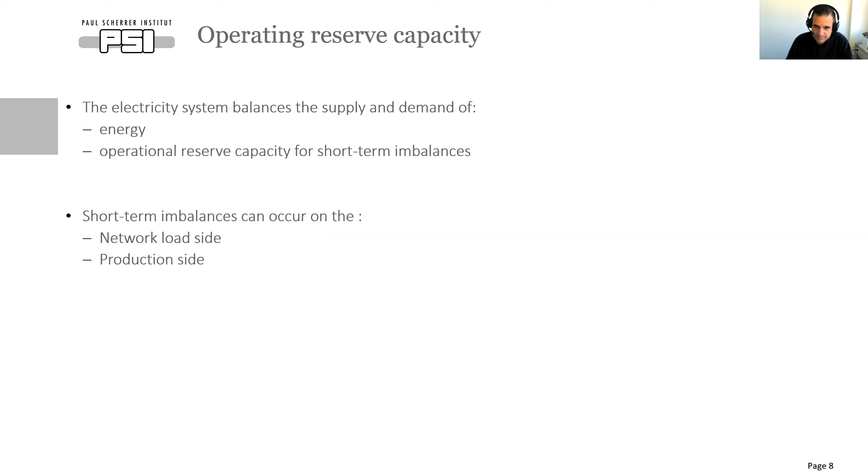And basically, what we see here on the right is a power plant operating at a level which is defined by the variable var online. So var online is the online capacity of this power plant, which has, of course, to be above the minimum operating level. And there is also the maximum capacity defined by var cap, and the available capacity, which is the product between var cap and NCAP AF.

Now, this area between var online and the maximum available capacity can be defined as upward operating reserve capacity that allows the power plant to ramp up when it's needed, in order to provide for a very short time the required power to the grid to stabilize the grid and also to balance again energy supply and demand in the case of imbalance.

Similarly, you see another yellow area towards the minimum stable operating level, and this is the downward operating reserve capacity, which means that a part of the generating capacity of the power plant is reserved. So the power plant doesn't go into this yellow area when it ramps down, but this area is reserved in order for the power plant to provide a downward reserve capacity.

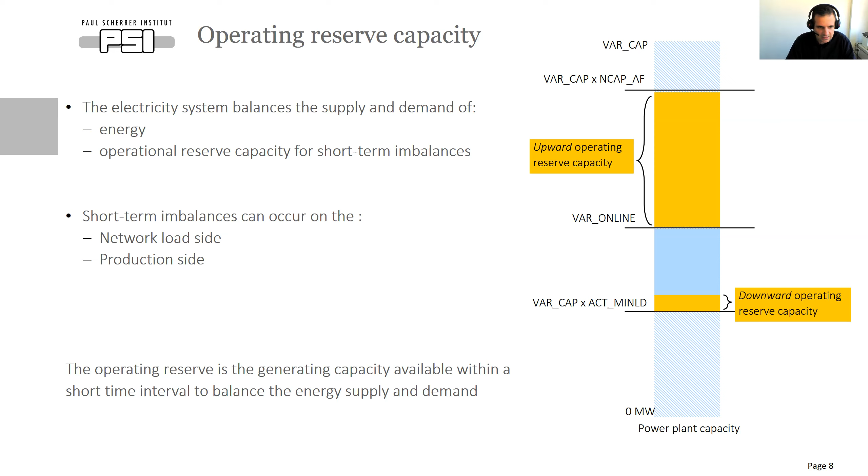So this is the operating reserve capacity, and it's called operating because this reserve capacity is employed when the power plant operates. And there are 6 types. Now you see 3, but I'm going to tell why it's 6 in a while. So there are different types of operating reserve capacity, and these types actually are differentiated according to their activation time.

So the fastest operating reserve capacity is called frequency containment reserve, or FCR. It should be activated automatically in seconds. So this means that this type of reserve can be provided by really fast ramp units. Then we have the second type of reserve, which is activated again in seconds, but not so fast as the FCR. This is called automatic frequency restoration reserve.

And it's activated after the FCR to relieve the units that provided FCR, because these units need to go back to the electricity production, to the electricity market. So additional units are coming online to continue to provide operating reserve if this is needed. And this can be automatic or it can be manual.

And the third one is the so-called replacement reserve, which is activated after the FRR. And this has an activation time of hour. So if the disruption in the grid or in the supply-demand balance is longer than some minutes, then the FRR units are relieved. They go back to the electricity market, and additional units providing the replacement reserve are coming into the reserve market. The RR, the replacement reserve, is not always implemented by all TSOs.

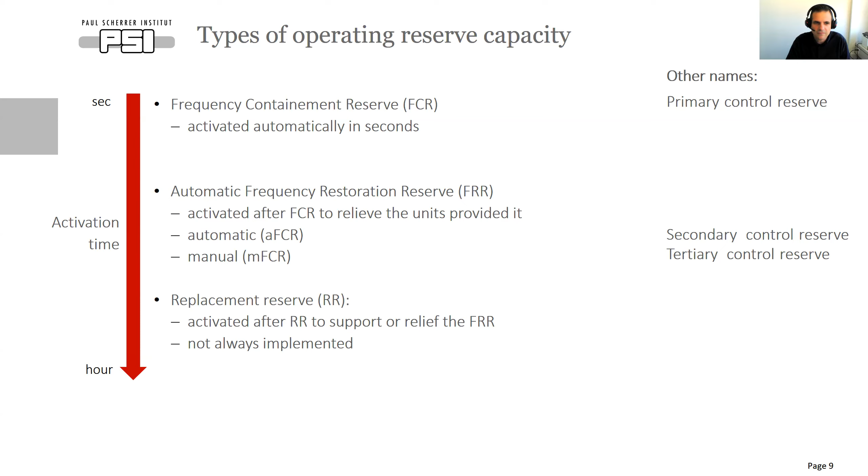The nomenclature of these reserves follows the ENTSO-E convention. There are also other names for them, like primary control reserve, this is the FCR, or secondary control reserve, this is the automatic FRR, or tertiary control reserve, this is the manual FRR.

And the reserve can be positive, as we saw before, or negative. Positive when there is a shortage of supply and we need to increase the production capacity, or negative when there is excess of supply and we need to reduce the production capacity. It follows that negative reserve can also be provided by demand units.

For instance, from a heat pump, when there is excess supply, then we can employ additional demand devices to absorb this excess electricity. This is a negative reserve, and this can be provided by the demand devices. As I said before, heat pumps or batteries at the demand side.

So let's see a practical example of how all these reserves are coordinating and are linking together. So I will try to put my pointer. Okay, good.

So let's assume that we are in a normal operation of the European grid. This means that the grid operates at the 50 Hertz frequency. And suddenly, in France, a power plant goes down. What is happening in this case is that there is instability in the grid. So you see here that this power plant was providing a power of 1.2 gigawatt. And then for half a minute almost, this power is lost, and this causes a drop in the frequency, which is not good.

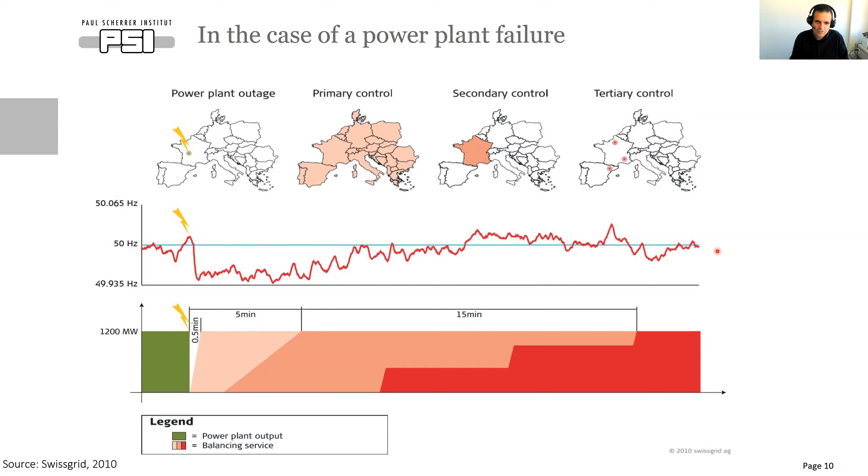So as you can see, there is a hierarchy on how these reserves are activated. First comes the very quick reserve, the FCR primary, then the secondary, which is for a longer period of time, and then the tertiary.

So one key point here is how we calculate the demand for reserve requirements. And this is very complex and can differ between countries, and it can be different for reserve types. Usually it is a mix between deterministic and probabilistic approaches. Now I'm going to show you a very scary picture, but I'm not going to go into the details. So this is a real example. This is how the Belgian TSO calculates the reserves.

And basically what you can get from this picture is that these reserves are calculated based on the forecast errors of solar PV, of wind, of some outages, and other imbalances in the system. These are all probability distributions that are joint. They create a complete joint distribution of all these imbalances of the system.

And then what we try to do is to set the reserve demand at that point in this distribution where we lose about 1% of the load, so that we cover 99% of this distribution that we are able to meet, and we have a probability, let's say, of 1% to lose the load. At that point, we set the reserve demand. But I will come back to that. So, what I'm trying to show here is that it's quite a complex procedure.

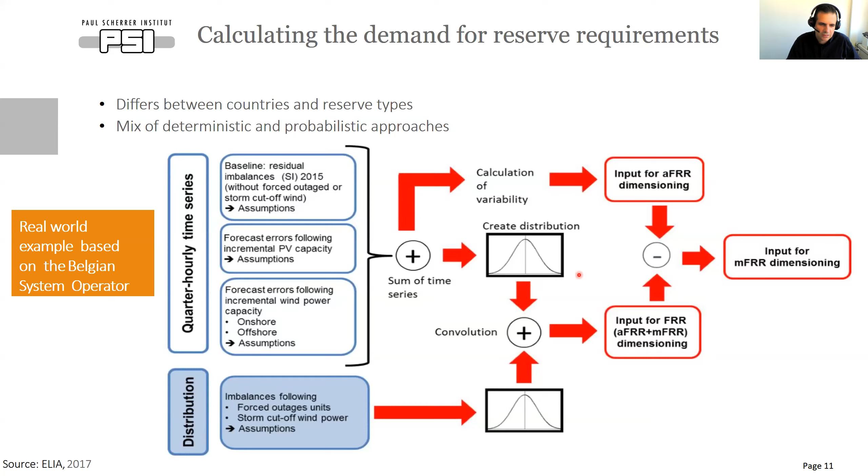So let's decipher a little bit this complex procedure. The deterministic component of this demand calculation usually is equal to the loss of the largest single grid element. This can be a power plant, a grid transformer, a grid power line, and it's calculated both for negative and positive reserve. Also, sometimes this deterministic component is used to determine the reserve which is outside the control area of the country. And I will give an example on that.

In the ENTSO-E control area in the European grid, the FCR, the fast activated or primary control reserve, is not defined by the countries per se. This is defined by ENTSO-E because maybe you remember in the picture that when this happens, all the European plants need to go and provide it. So this needs to be defined centrally, and ENTSO-E defines that. And each country in the ENTSO-E area has a specific contribution to this reserve. And this is fixed, defined by ENTSO-E. It's outside the scope of the country.

Usually this is 3 gigawatt and contains the N-2 criterion, which means that ENTSO-E considers the largest 2 elements in the European grid. So this 3 gigawatt FCR is allocated to the different countries based on some algorithm that ENTSO-E applies. And this is the allocation for 2018 in this graph, where Germany needs to provide 600 megawatt, France 560, Greece 56, and so on. So this depends on the size of the country. For us this will be a deterministic approach, because when we're building a national model, this will be given.

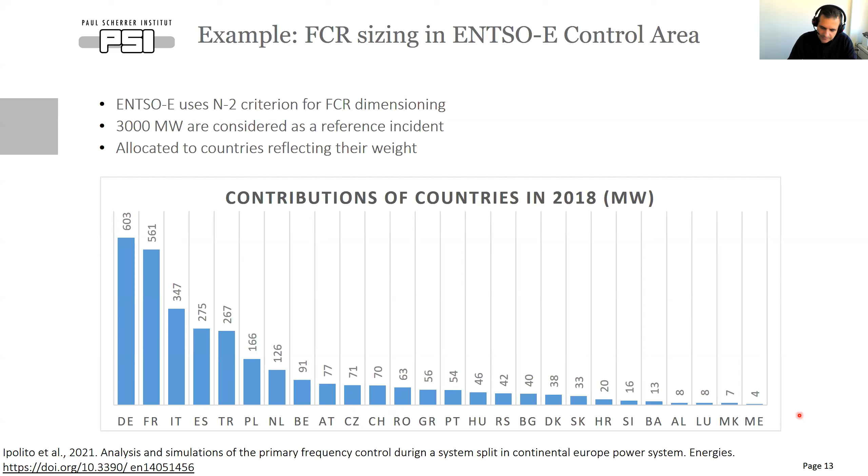Then we have the probabilistic component of the demand calculation. This probabilistic component, as I said before, is based on the forecast errors. And this can be calculated based on the historical time series of the system imbalances when these are occurring. And it's represented as a probability density function. So what we care about here is that the total contracted reserve covers at least 99% of this PDF. So let's see a little bit what is happening here.

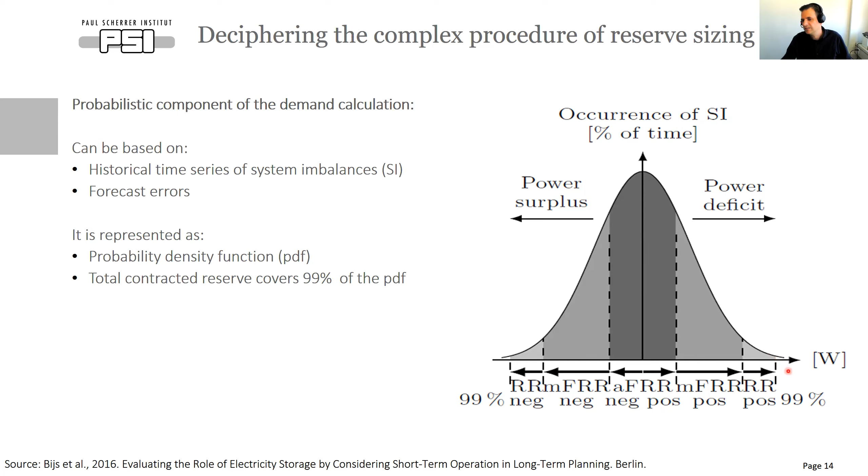So to set the demand for the secondary reserve, I move 1 standard deviation from the forecast error. So at this point, I set the demand for my secondary reserve. At this point, I set the demand for my tertiary reserve. And at this point, I set the demand for my replacement reserve. And this we have seen in a more simplified way.

What is important here is that when the reserve provision comes from a non-storage unit, what comes into play is the minimum stable operating level of the unit and the ramping rates for energy production, and consequently the ramping rates for reserve provision. So we need these dispatching parameters also in our modeling framework, the minimum stable operating level and the ramping rate.

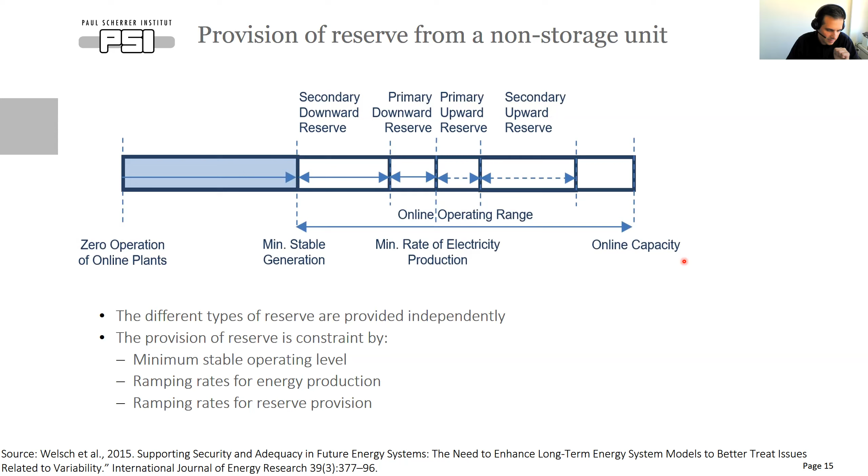And when the reserve is provided from storage, then we need to consider the fact that the storage needs to ramp up for some point in time in order to have enough energy to provide a reserve provision of power P, and then this energy needs to be also enough in order to give this power to the grid, to the reserve market, for a certain point in time. So the energy that the storage needs to have is the area under the triangle and the area under the square. This is the assumption also that we will take into the extension of TIMES.

So when a storage will go to the reserve market, we need to specify how much time it needs to ramp up the energy stored so that it can provide power P, and then how much energy needs to be charged in order to continue this provision of P for a certain point of time.

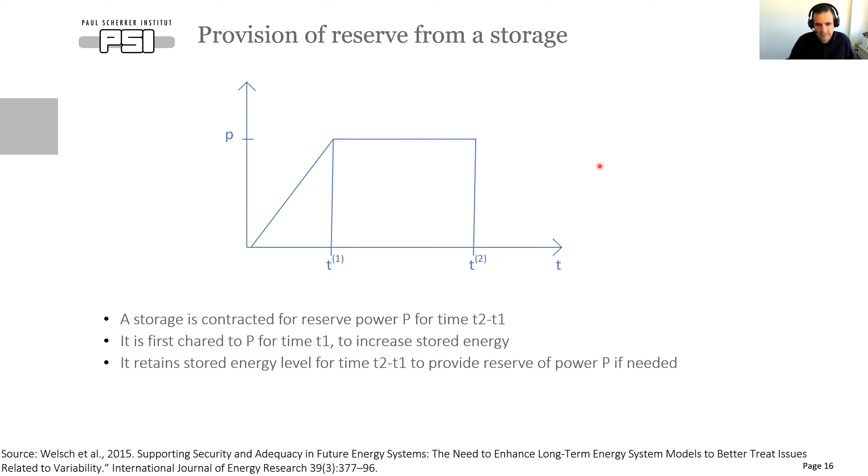And here comes a question: what is the difference between the planning reserve margin and the ancillary reserves markets? The planning reserve margin is the peak constraint that we have in TIMES. And actually, this is basically defined as a long-term forecast of the demand, and we give that as a percentage of the median peak load. And you can see here how the planning reserve margin is calculated by TIMES. So this is a very simplified approach again, but it gives the notion behind.

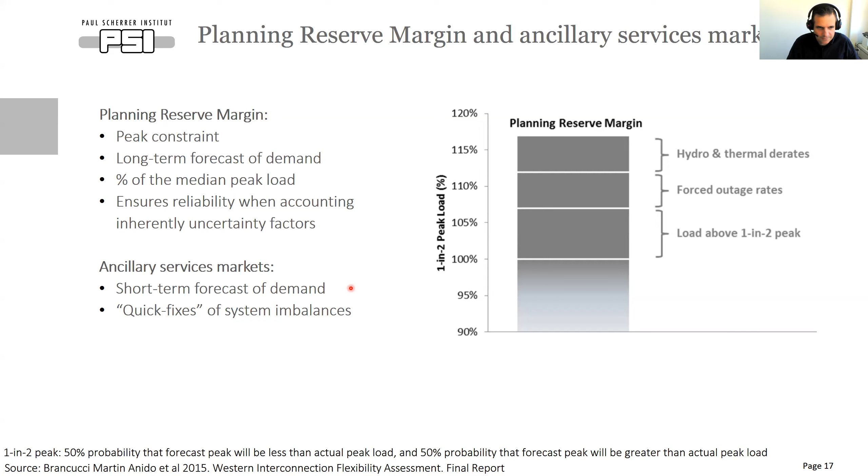The ancillary services markets, we can say that they are quick fixes of the system imbalances that are balancing the short-term forecast of the demand. So in that case, when something happens, let's say for 1 day, you don't have the luxury to get a new investment in capacity. So the planning reserve margin influences the long-term investment and operating decisions. The ancillary service markets influence the short-term operational decisions. So this is a brief overview of the ancillary services markets.

Each reserve is a TIMES commodity, a normal TIMES commodity, defined by the user, whatever name the user wants to give. Of course, when we talk about reserve provision, it means that we just have the capacity available to provide the reserve. So there is no consumption related to the reserve provision. The fuel consumption relates only to when the reserve is activated, and this we don't model. And the price of reserve will come as the marginal cost, the shadow price of the EQ_COMBAL from the commodity balance, as every other normal commodity of TIMES.

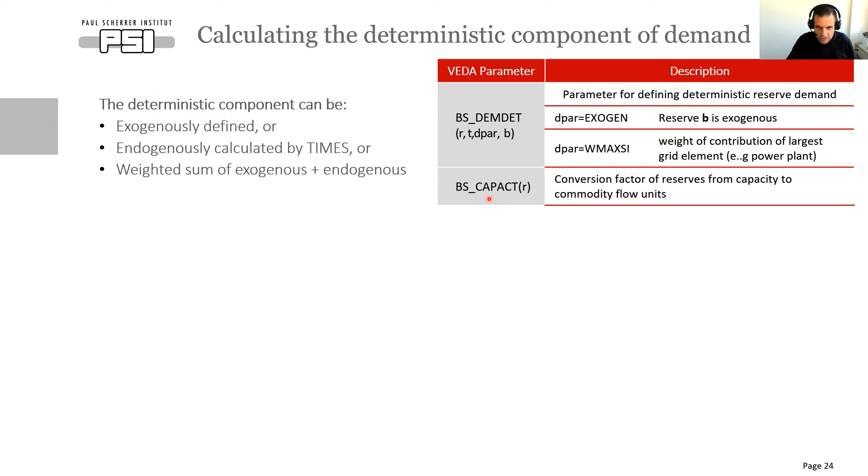I'm not going to give a lot of equations, only the most important ones, and this is quite an important one: how the deterministic component of the demand is calculated. As you can see here, this equation says that the deterministic demand for balancing services should be greater than or equal to the exogenously defined deterministic demand. This BC here is this BS_CAPACT, plus the endogenous deterministic demand specified as a weight of the maximum component of the grid.

What is happening here is that this inequality is repeated several times, once for every process defined by the user as contributing to the calculation of the largest grid element. So if the user specifies that nuclear, hydro, pumped storage, and for instance an interconnector should participate in this calculation, this inequality repeats 4 times, and it is satisfied, of course, by the maximum.

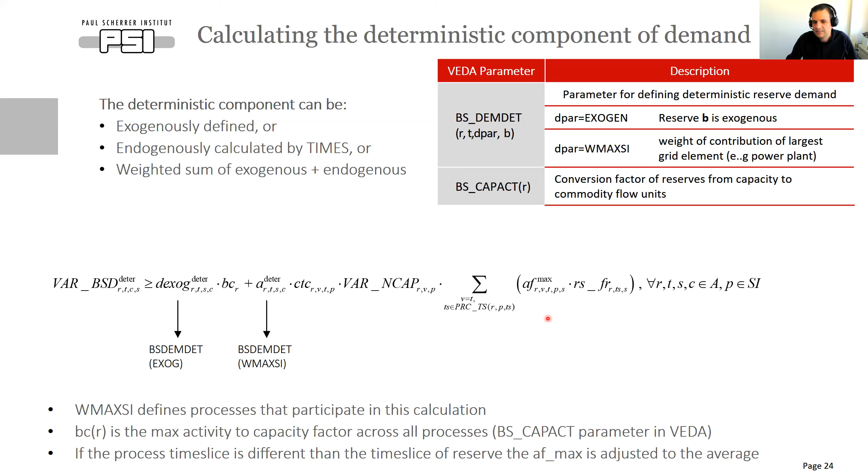So in this case, what TIMES will do, we'll see what is larger: the nuclear power plants or the grid interconnectors. This implies that this inequality here will be repeated 2 times, one with VAR_NCAP on nuclear, and another one with VAR_NCAP on grid. It follows that if the grid, for instance, is larger than nuclear, the second inequality becomes binding, and the first one becomes redundant. This is how the maximum largest component is considered into this equation.

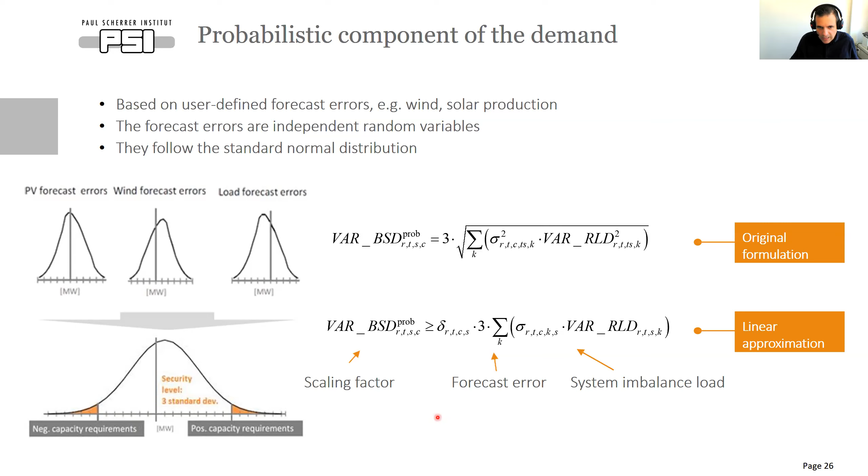Let's see how we can define this. So I repeat here the demand equation for the probabilistic component. We need just 2 parameters: the sigma, which is the forecast error regarding a variation k, meaning if it is the forecast error on wind, k equals wind, or solar, or demand, etc. And the delta, which is this adjustment that we do in order to make a better approximation. It's pretty straightforward, I hope.

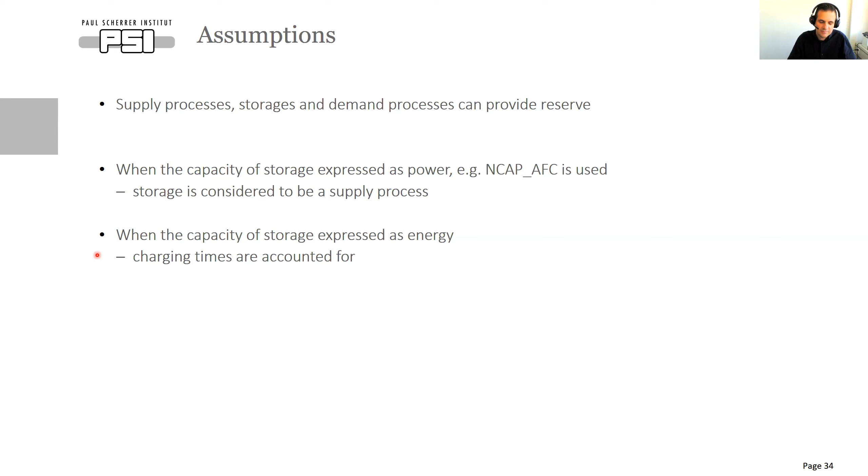But if the storage capacity is expressed as energy, which means that the capacity of the storage is bounded by the stored energy, then we need to take the other approach where we need to take into consideration how much energy the storage needs to have in order to be able to provide the power that needs to be provided, plus to have enough energy to continue providing this power for a given time.

So for the reserve provision from supply processes, there are only two parameters that one can use. The most important of the two is the BS_RMAX. The BS_RMAX is the maximum contribution of a process to the reserve provision of a given type and considers the ramping rate and the duration of the reserve provision. And you can see here the example.

If I have a coal process in my model in which I have identified an hourly ramping rate, 30%, and this process is contracted, needs to provide secondary reserve for 7.5 minutes, then what I do here is that I set the BS_RMAX equal to 30% divided by 60 minutes, multiplied by 7.5 minutes, and this becomes 0.0375. So this means that 3.75% of the available capacity of the process, because of the constraint that it has on the ramping rate, can be contracted for reserve provision.

And how you find the 7.5 minutes, this is again from the configuration of the ancillary services market of each country. Important is, and you can see here some example, that the BS_RMAX needs to be higher for the slower reserves. So the slower the reserve is, the more capacity is available to provide it. If we don't set the BS_RMAX for a process, the process does not participate in the ancillary services markets. If a storage is modeled with NCAP_AFC, so the capacity of the storage is expressed in power units, the BS_RMAX needs to be defined.

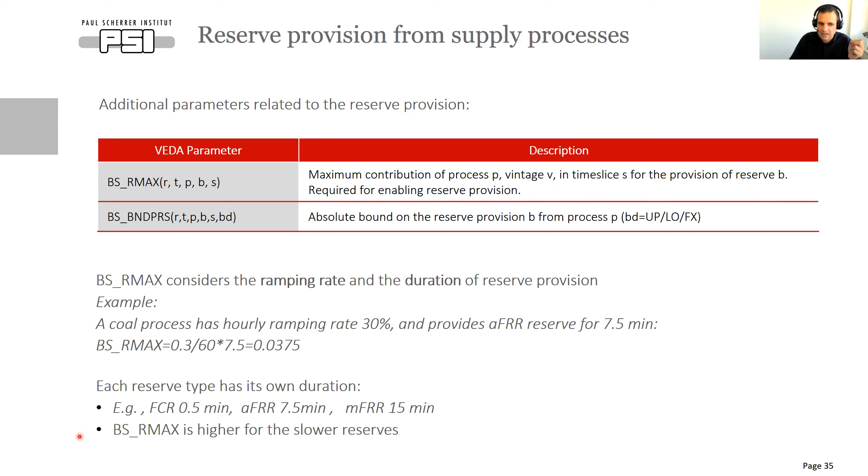This implies that for the supply processes, because the BS_RMAX relates to the ramping rates and also implicitly to the minimum stable operating levels, these two VEDA parameters for minimum stable operating level and maximum up and down ramping rates need also to be defined. Otherwise, the equations do not work.

The same holds for the reserve provision for demand processes. So it's again the BS_RMAX that defines that a demand process needs to go into the reserve market. Of course, a demand process provides negative reserve and doesn't have a ramping or minimum stable operating level. So here, the BS_RMAX just applies as a percentage on the available capacity of the demand process.

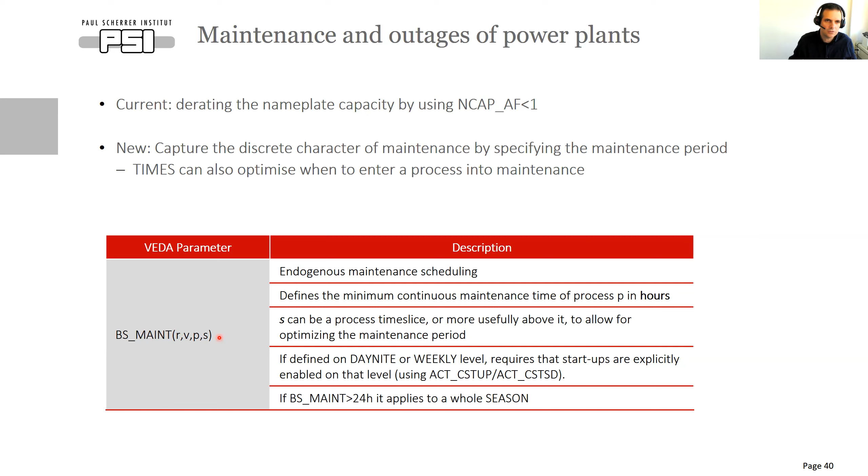So if we enable this parameter here, the balancing services maintenance, which is defined over region, vintage, process, and time slice, we instruct TIMES that it can do an endogenous maintenance scheduling. And what we give here is how many hours this maintenance lasts. If this maintenance is more than 24 hours, this applies to the whole weekly level or to the whole season level. It depends how the time slice tree is defined. And this means that the power plant will not be available for certain time slices. So this is complementary, if you want, to the NCAP_AF.

And another extension came with this, but is also in the normal version of TIMES. So for this particular one, you don't need to enable the balancing services, while for the previous one, you need to enable it. This is an approximation of the storage degradation due to extensive cycling. So there is a parameter called STG_MAXCYC, which is the maximum number of cycles for a storage process. It has a particular application when we are considering especially batteries in electric cars, and I'm going to give an example of how this is working.

So let's say that the capacity is 1 gigawatt hour. This is my installed capacity of batteries. Okay, 1 gigawatt hour obviously is not for one electric car. The lifetime is 10 years, and the maximum cycles are 4,000.

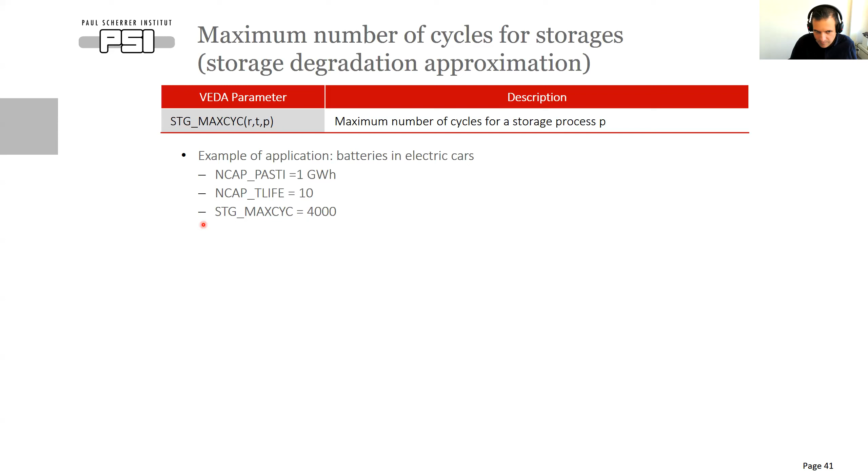Let's say that I have 2 seasons in my time slice tree, season 1 and season 2, where the first season I have it very nicely on an hourly level, while the second season has 6 time slices, S1, S2, S3, S4, S5, and S6, which means that each time slice here in season 2 corresponds to 4 hours in a day.

And you can see here how TIMES schedules this battery of electric cars. So it charges the car during the night in season 1 and discharges the car during the peak hours, when people, let's say, are coming home after work, and the same in season 2. And let's see a little bit what is happening here.

So in the VAR_FIn, what is coming into the process over the whole year in both seasons is 1.8 petajoules. This is 500 gigawatt hours. What comes out is 450 gigawatt hours. Based on the fact that this storage operates maximum 4,000 cycles per year and lives 10 years, this means that on average, the targeted cycles per year is 4,000 divided by 10. This corresponds to 40 cycles.

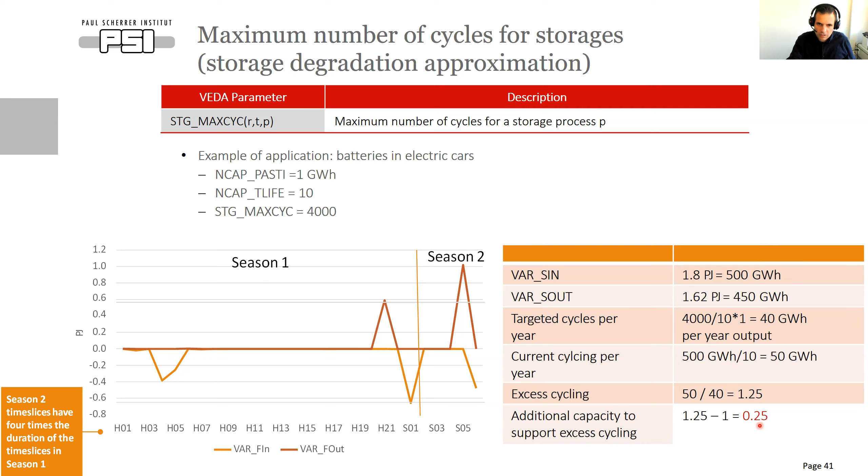25% of this capacity. So what TIMES is doing now, it invests an additional 0.25 gigawatt hours of this storage because this storage does an excessive cycling.

So I conclude with a working example. This is a simple RES for some testing purposes. Let's assume that we have one electricity demand here. And we have two gas processes, an open cycle and a combined cycle, a hydro storage dam, a nuclear, a PV, and a wind. Also, we have a battery and a pump hydro storage. And this is my grid, transmission and distribution, that distributes my electricity generation to my demand.

And let's look a little bit down here first. Let's say that these are my power plants. These are my installed capacities, my minimum operating levels, my hourly ramping rates, and my minimum online and offline times. And here are my demands. So I have a total demand here of 60 terawatt hours or 10.7 gigawatt peak.

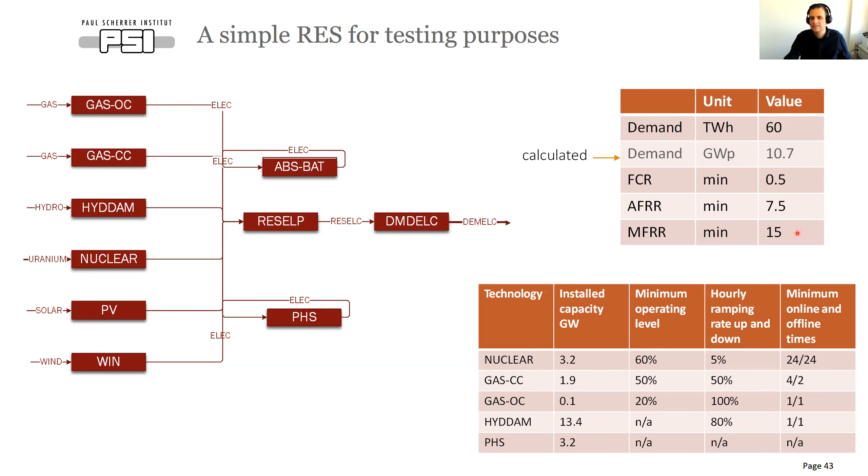And these are the demands that I have for the reserves. These are the durations of the reserves that I need to provide. So FCR, I need to provide it for half a minute, aFRR for 7.5 minutes, and mFRR for 15 minutes. So then I need to know what is my ancillary service market configuration. In this case here, we take some assumptions based on the country that we're modeling.

This is what is given to me, which means that the dependency factor between aFRR and FRR is equal to 0.8 based on these two quantiles. And here are my forecasts. The solar forecast error is 1.5%, the wind forecast error is 0.8%, and my demand forecast error is 1.7%. So I have all the numbers for the parameters that I need.

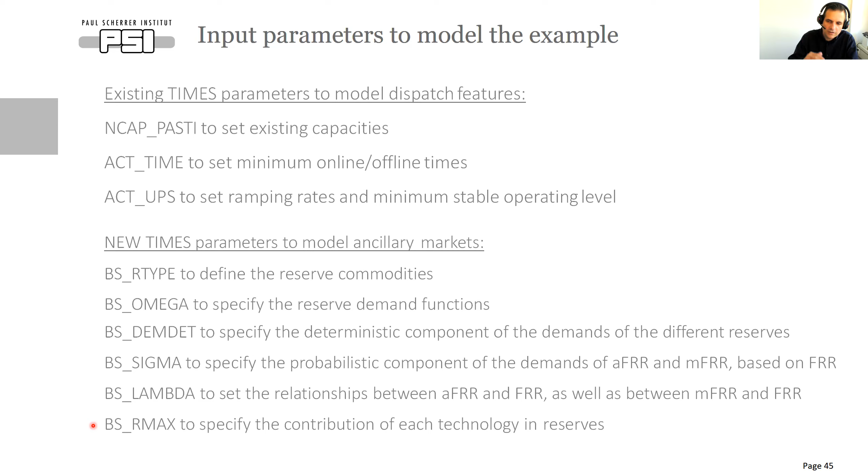The lambda to specify the relationship between aFRR and FRR, which is 0.8 as we saw before. And the BS_RMAX to specify the contribution of each technology in reserve based on how long this reserve should be provided and how much is the ramping rate. And I put that into Veda as we saw before in this example.

And here I have 3 scenarios: a base scenario, a scenario where I don't model ancillary markets, but I have only a peak constraint of 30%, and a scenario where I don't model a peak constraint, but I only have ancillary markets.

So my first scenario is no peak constraint, no ancillary markets. The second scenario is no ancillary markets, a peak constraint of 30%. And the third scenario is no peak constraint, ancillary markets, just to show to you how it works.

And this is the installed capacity in order to satisfy the demand that I have, by assuming that for the peak 30% scenario, the contribution to peak reserve from hydropower is derated to 60% and from pump storage to 50%, while there is no contribution to peak reserve from solar and wind. And we can see, of course, that in the base and in the peak 30%, we don't have investment on gas open cycle. So we miss a flexibility option here.

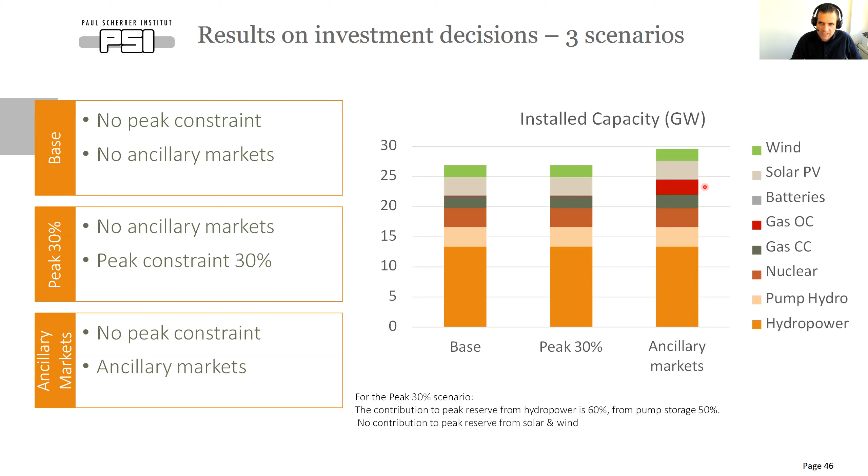This flexibility option, however, comes when we enable the ancillary markets extension. So this is one altering in the investment decision, that it can enable investments in additional flexibility. And the results on operational decision by comparing the peak 30% scenario. Of course, the base and peak 30% scenario do not have differences in the operational decisions, because the peak constraint affects only the installed capacity. The model is free not to use at all this capacity. So they have the same operational decisions.

And here is the ancillary market scenario, where we have the ancillary markets, but we don't have the peak constraint. And we can see, first of all, that we have the dispatch also of the gas open cycle. So the flexibility option is not only invested in, but also is used, because it better captures the remuneration of the flexibility capacity in the ancillary services market. And of course, it can lead to a smoother and perhaps more realistic dispatch profile, because additional operating and technical constraints are now considered.

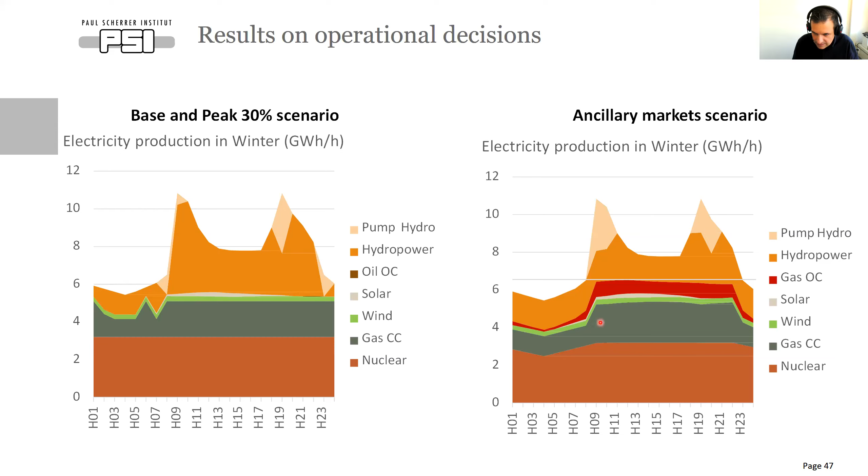And my last example that I want to show to you is this extension on the capacity under maintenance. So here we say, let's force a maintenance of up to 30% of the installed gas combined cycle capacity for 5 hours. So this means that our gas turbine combined cycle power plants need to shut down for 5 hours for maintenance. Of course, I use here 5 hours because I wanted to scale it to 24 hours. If it is more than 24 hours, then it applies to the upper seasonal level of the time slice tree.

And I set my two parameters. Here I say that in this particular example, I want this maintenance to happen in summer, but I don't know in which 5 hours. So TIMES is free to choose in which 5 hours this power plant will go out. So what I do here is, first of all, because I want this to be in summer. This is my assumption. Of course, I'm not obliged to say that this should happen in summer.

But if I want to specify a particular season, then I say with NCAP_AFS, I derate first the gas capacity to 70%, because 30% in summer will not be available. It will be under maintenance. And of course, this 70% here always depends on how you model the time slice tree. Here I take the assumption that the season is 1 day also. And this BS_MAINT, this new parameter, is set to 5 hours.

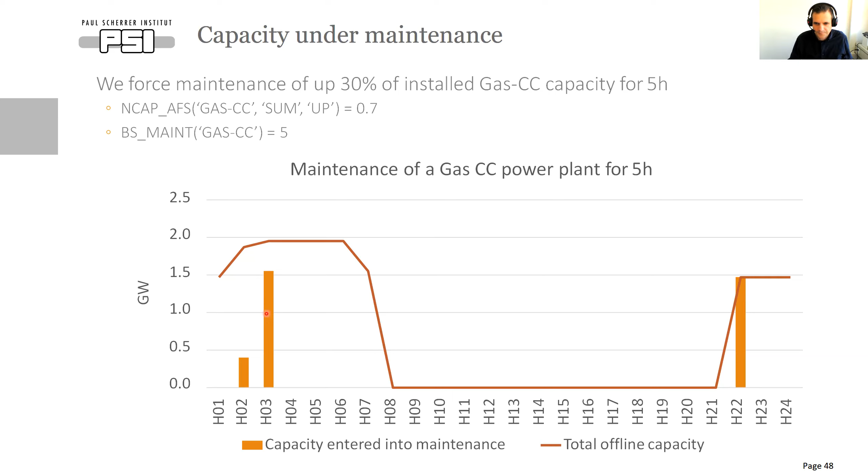Yes, so that is all from my side, and I hope that you get a feeling how this works. There is more information and more examples in the balancing services documentation, which is available on the ETSAP website. Thank you.

Okay, thanks a lot, Vangelis, for all this. I can see you're really tired after talking for all this time.